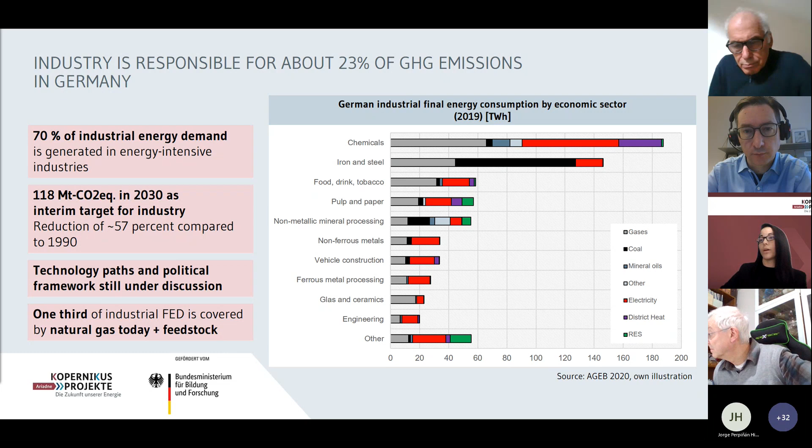In our scenario analysis in the Kopernikus project Ariadne, we normally try to gain knowledge by comparing different alternatives. We looked at 5 scenarios in this project, but today I will only talk about 2: the mix and the energy sovereignty scenario, which are both climate neutrality scenarios.

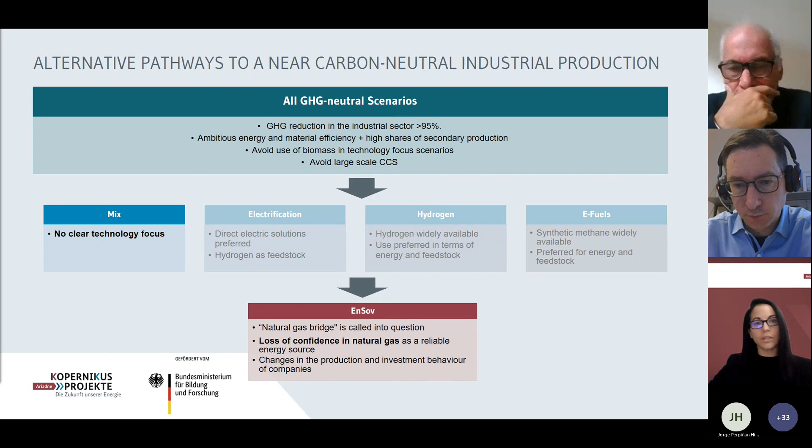In 2045, we want to achieve near climate neutrality in industry. In the mixed scenario, we have no clear technology focus, meaning we mainly use technologies with a very high TRL in the sectors, or which are discussed as particularly promising. In the energy sovereignty scenario, shown in red, the scenario is characterized by a very strong loss of confidence in natural gas as a reliable source of energy, so companies, especially in the short term, try to do everything to reduce their demand for natural gas.

When we look at the overall scenario results, on the right-hand side is the industrial energy consumption for Germany, energetic and feedstock uses for both scenarios. In both scenarios, not surprisingly, we see that the industrial transformation really needs high amounts of CO2 neutral energy carriers. In red is the development of electricity, blue is the future hydrogen demand. Depending on the scenario, we achieve between 250 and 280 terawatt hours electricity demand for industry, and between 200 and 300 terawatt hours of hydrogen demand in industry. This is even though we already assume very ambitious improvement in material efficiency, circularity, and changes in activity effects in the scenarios.

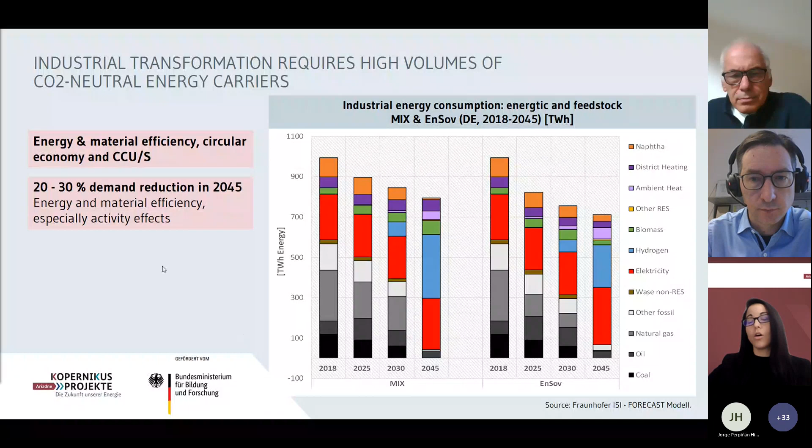What we see on the right-hand side in the energy sovereignty scenario, where we have this loss of confidence in natural gas, is that we will have a very strong reaction to the high natural gas price signals, which leads to a permanent decline in natural gas demand in this scenario, around 50% compared to today's level, mostly taking place in steam and hot water generation in industry.

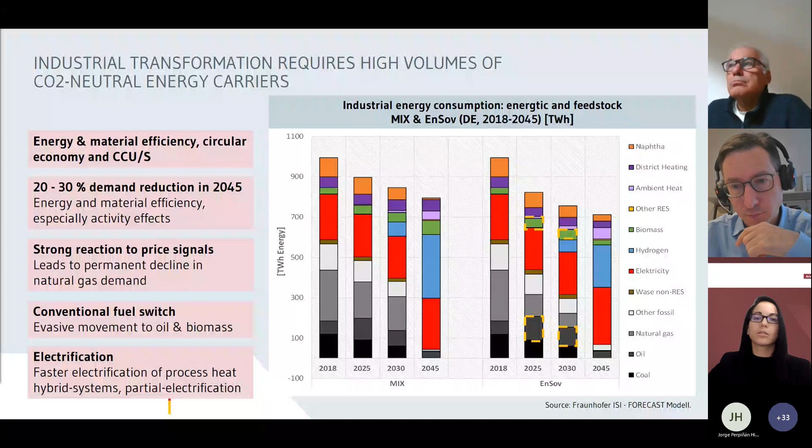But what we also see in parallel is that, without additional measures, there is an evasive movement in this sector toward more CO2 intensive energy carriers like oil, but also to a certain degree biomass, because electricity is not competitive without additional measures. To counteract this evasive movement, faster electrification of process heat, for example using hybrid systems in steam and water generation, but also maybe partial electrification in the area of furnaces, could help counteract this short-term target conflict with our long-term climate neutrality ambitions.

What we see relatively robust throughout all scenarios we looked at, including others not shown today, is hydrogen demand in steel production via direct reduction, and also as a feedstock for the chemical industry. This demand is really distributed among very few industrial locations, I think around 20 in Germany.

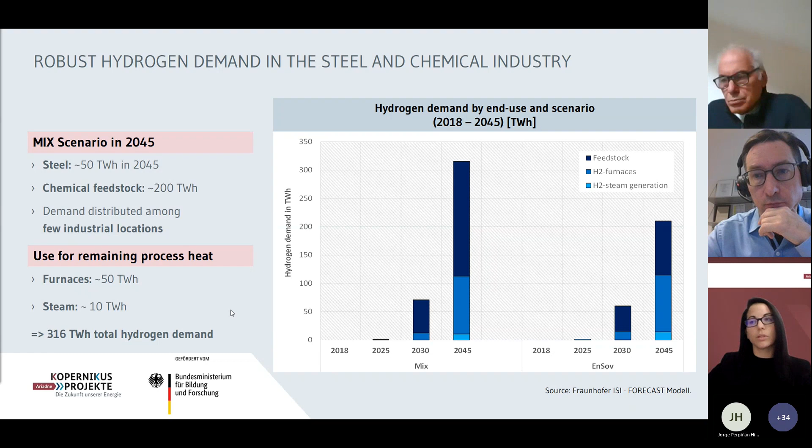If we would increase this demand up to the remaining process heat, we see here 60 additional terawatt hours of hydrogen demand in the scenario. This demand would then really require a large-scale expansion of the hydrogen distribution grid. Especially the use of hydrogen or electricity in the remaining process heat really depends on sector-specific factors, especially in the area of furnaces, which are very heterogeneous and require individual considerations. So there is still a certain degree of uncertainty for the remaining process heat via either the use of hydrogen or electricity.

For the chemical industry, we see a certain challenge because in the decarbonized target system, new sustainable carbon sources need to be developed. In our scenario, where chemical production stays in Germany and is probably based on green hydrogen, we would need 30 million tons of CO2 demand to produce methanol and high-value chemicals via the MTO route. One way to provide this CO2 could be to capture and use emissions from other industrial sectors, especially sectors that are very hard to decarbonize, like the cement and lime industry.

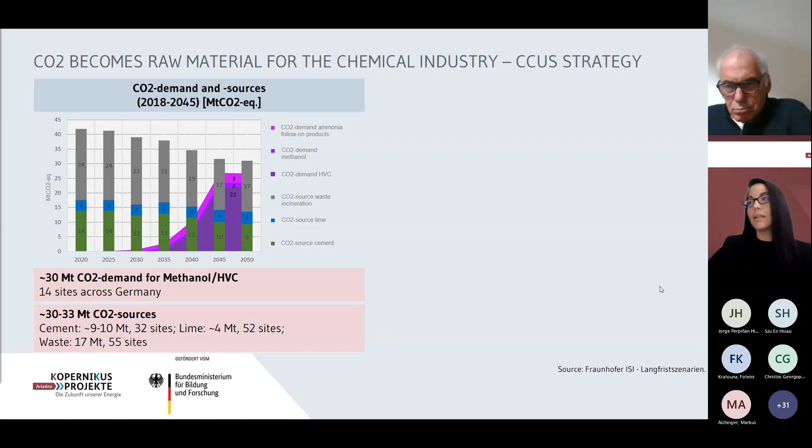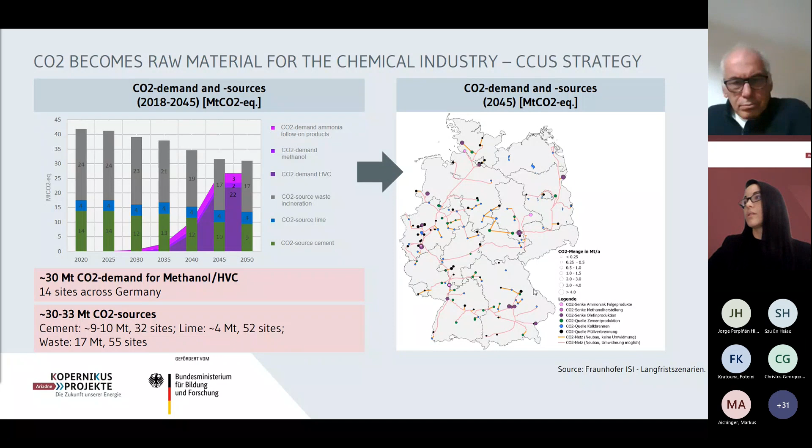The potential sources and the potential demand would more or less add up in this scenario, but there are still challenges, because to really address these potential sources and demands, you need a combined carbon management strategy. On the right-hand side, you see a potential CO2 transport network for Germany, more than 5,000 kilometers, which could partly be generated by reusing the existing gas network. But there are also other potential conflicts, since this gas network could also be used to produce power-to-gas or hydrogen. So we really need a combined strategy to address CO2 demand and sources and build up the necessary infrastructure.

The German steel industry also has a very special role in the transformation of the industry sector because it's central in ramping up the hydrogen market. In Germany currently there are various announcements from different companies that around 15 billion euro investment will take place to hopefully provide 10 million tons of crude steel production capacity via green hydrogen reduction by 2030.

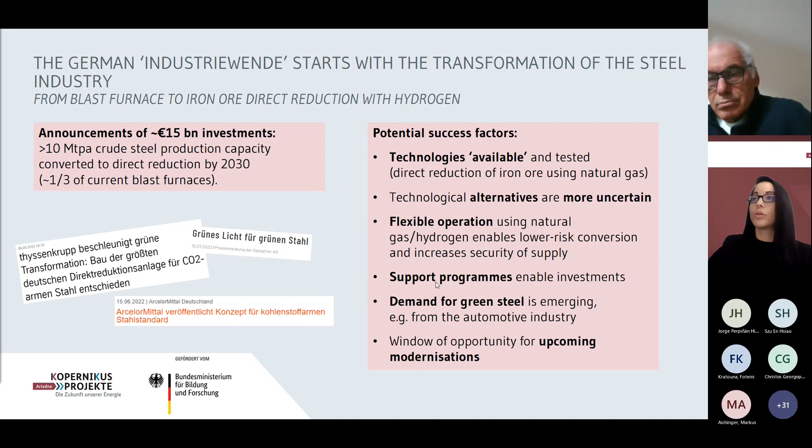There are some factors that let us hope this will be successful. There is already experience with this technology, and green hydrogen reduction combined with natural gas has the potential to provide flexibility for the energy system - using natural gas when electricity prices are high, and hydrogen when we have a lot of renewables in the system. We also see support programs coming to enable investment, and a market building for green steel, especially from the automotive industry. There's also a window of opportunity because of upcoming modernizations in the steel industry, which should now be tackled by transferring the sector to green, CO2-neutral production technologies.

What we also see is that industry is still in a very strong tension field between economic efficiency - now facing very high natural gas and electricity prices - security of supply with the limited availability of green hydrogen in the near future, and sustainability. So there is still need for improvement, and forward planning is really necessary.

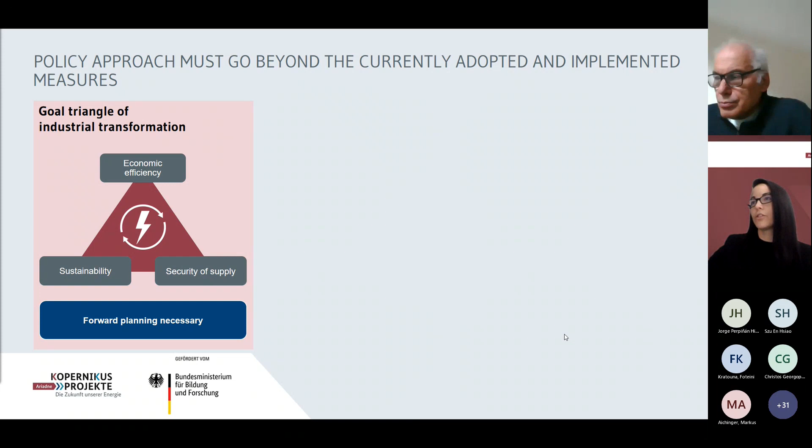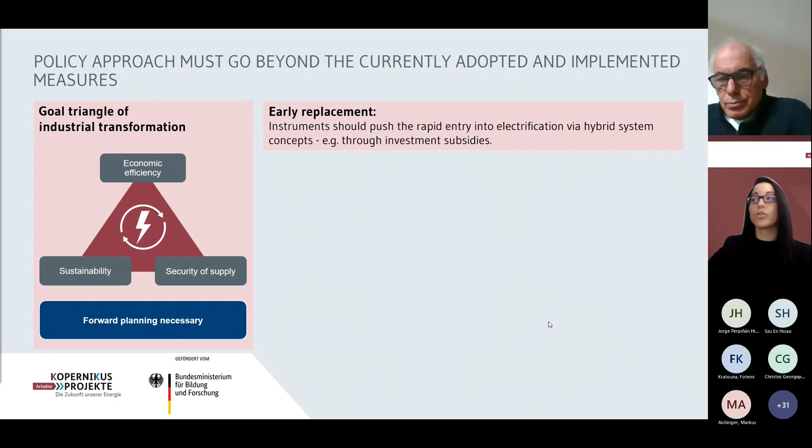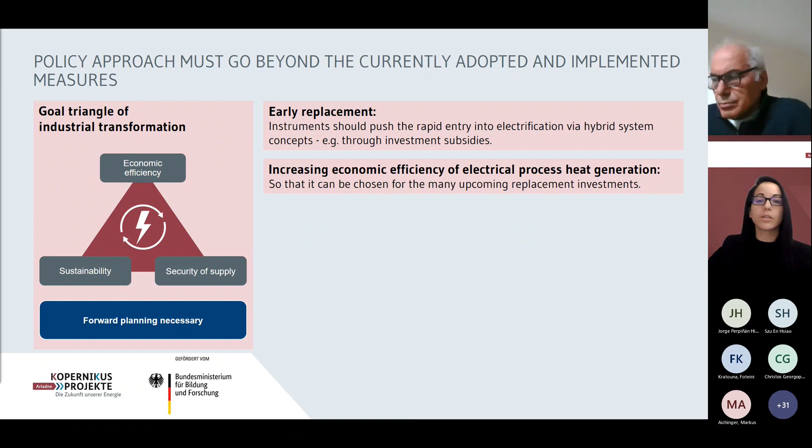Here are some ideas on what are really relevant points for the industry sector in Germany. We need instruments that support the early replacement of plants in steam and hot water generation to push electrification. We also have to increase the economic efficiency of electricity, which is currently not competitive with fossil sources and biomass. What we also need is a very strong and reliable CO2 price signal so that we can get very CO2-intensive energy carriers like coal or fuel oil out of the system.

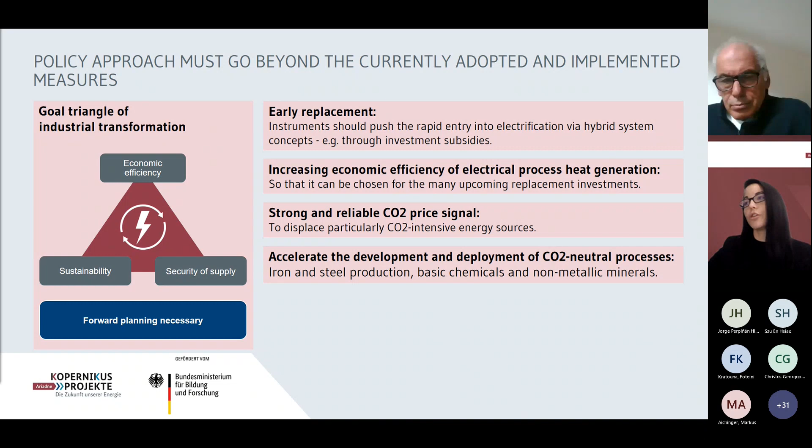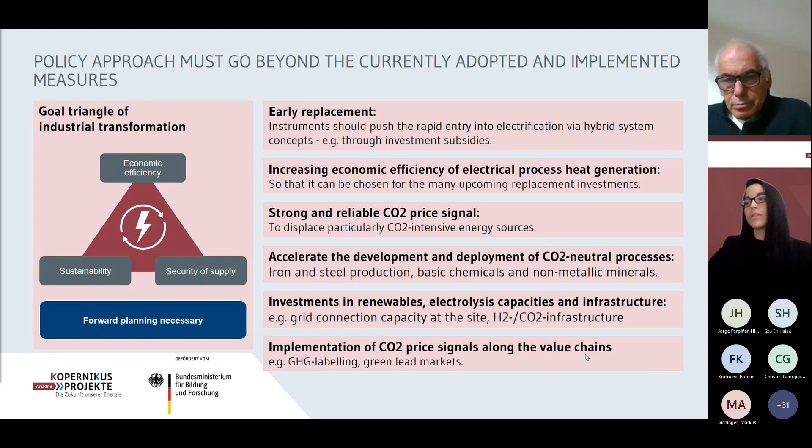Overall, we also need to accelerate the development and deployment of CO2-neutral processes for steel, chemicals, and non-metallic minerals. As I said before, this will only be possible if we have the necessary investments in renewables, electrolyzer capacities, and the necessary infrastructures. Last but not least, there also needs to be a market for these products, and a possibility to pass these CO2 price signals along the value chain to the end consumers. One possibility could be the establishment of green lead markets.

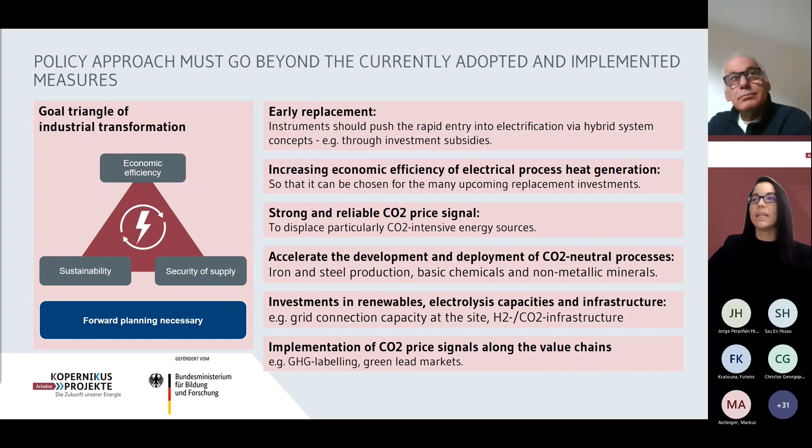And with this, I give you only a very short introduction into what we do in our system analysis project, and I'm looking forward to your questions. Thanks.

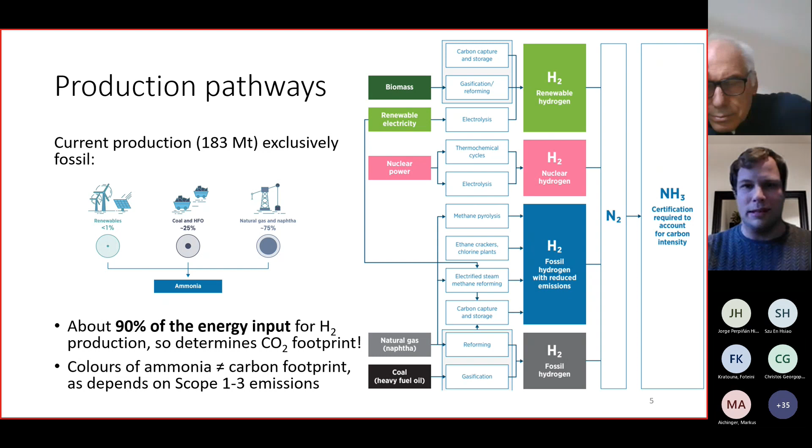Another thing to keep in mind is that colors of ammonia - green, blue, pink, gray - are useful for discussions of how the ammonia is produced, but it is not equivalent to carbon footprint, because depending on where you source your energy or electricity, it really determines in the end your carbon footprint. So for that, we need certification.

When looking at decarbonizing ammonia production, we see that a lot of projects have been announced. We keep a list of all these projects, and what you see here is the total capacity that is announced. You see that the total is somewhere around 170 million tons per year - that's a lot, almost the same as the current ammonia production.

It should be noted that this accounts for all the projects. There are quite some projects which have just an announcement that they want to produce renewable ammonia or low carbon fossil-based ammonia. However, there are quite some projects already starting initially with a few megawatts, a few tens of megawatts of renewable ammonia production. So that's quite interesting to see.

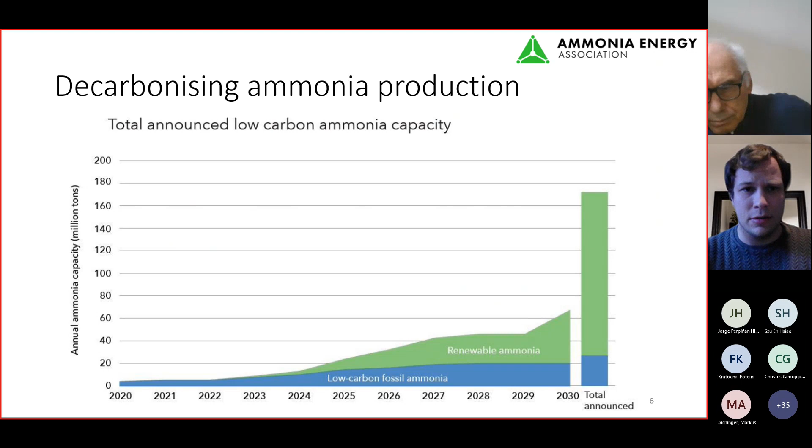So what are some of the drivers that we see? In the EU, we have this ETS system.

So basically, if you emit CO2, you're being taxed. And also CBAM. We see that the shipping industry will be fully introduced in the emission trading system by 2026, which immediately means that low carbon fuels for shipping in the EU become competitive with fossil alternatives like LNG and heavy fuel oil.

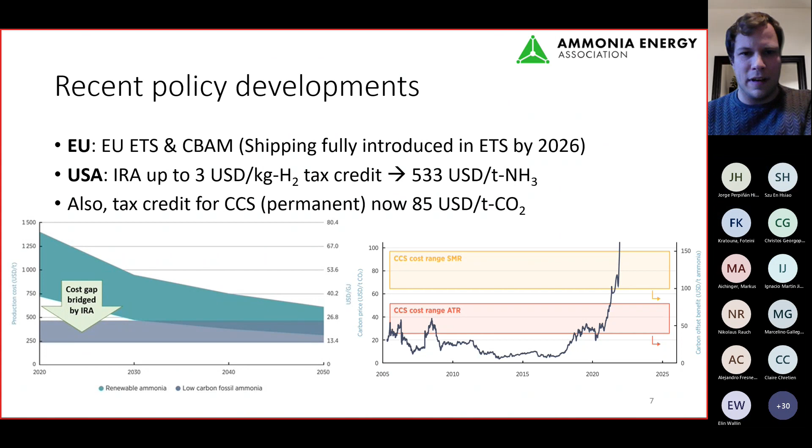So we can actually expect that the shipping market will be one of the early uptakers of ammonia. And also in the US, there is quite an aggressive package with the Inflation Reduction Act, with $3 per kilogram of hydrogen for the lowest carbon emissions, and it really is a driver to decarbonize ammonia production. And also for existing ammonia production, where you don't need CO2 downstream, they could actually do CCS, and the tax credit that you get for that now, so the $85 per ton CO2, that's actually competitive to put it into the ground versus emitting it. So these are quite some developments that make low carbon ammonia production quite competitive.

One note here is also that this has been operational for 100 years, but most of these plants have actually shut down, mainly because fossil-based ammonia production with natural gas was just a lot cheaper. So it is not a matter of technology readiness level, it's more a matter of economics. But as we see these new legislations coming into place with taxes on CO2, so some penalties, we might see a resurgence of renewable ammonia production.

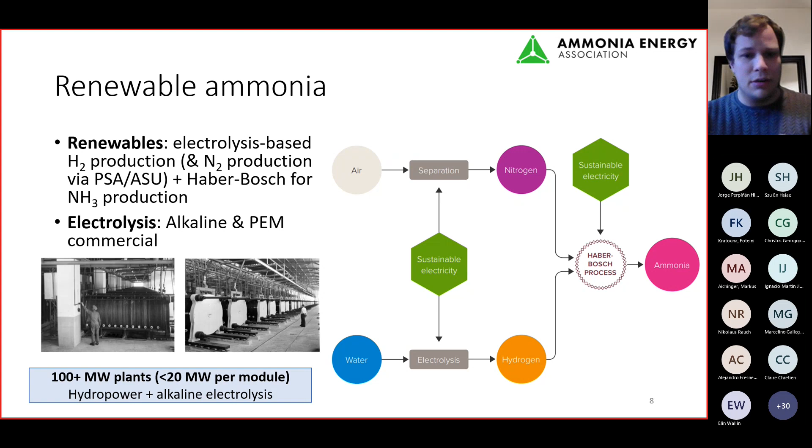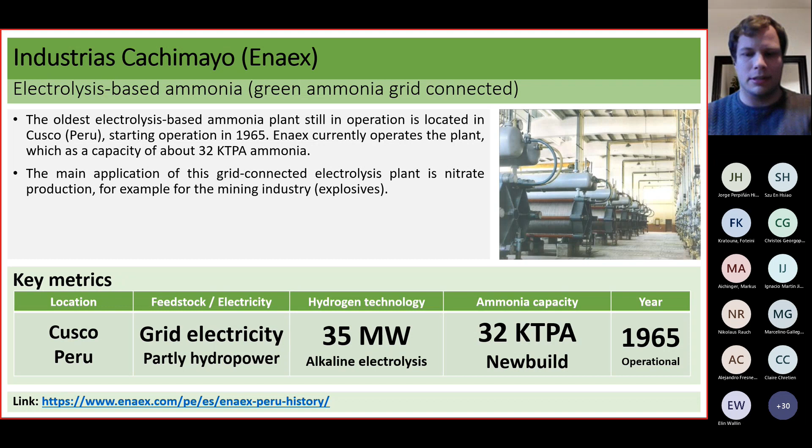So what you see here is actually the last of these old, as we say, electrolysis-based ammonia production plants. This one is located in Peru, a relatively small plant with 35 megawatts of alkaline electrolyzers. They produce about 32 kilotons per annum of renewable ammonia. In this case, it's connected to the grid, so no fluctuations. And recently they signed a new power purchase agreement where the electricity of this plant is 100% renewable sourced. So that is actually the last of the renewable ammonia plants based on hydropower that's still operational.

But what we see now is a lot of movement in renewable ammonia production from solar and from wind. And as you know, solar and wind are fluctuating. So this also means that there's a challenge to operate your ammonia plant in a fluctuating way. So you can do that based on either having a flexible ammonia loop or by having a storage buffer, for instance, for hydrogen storage, or maybe a small battery storage for your electricity. And typically in practice, it's a combination of both.

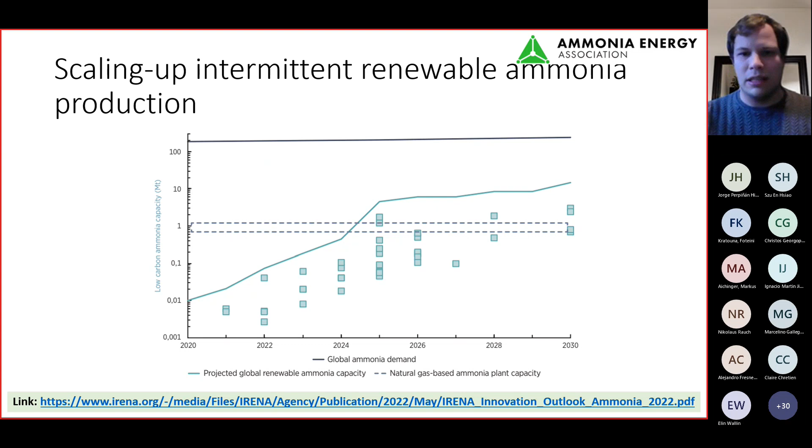But as this is not mature technology yet, so the fluctuating ammonia production, what we expect to see in the coming years is that the scale of these plants will increase every year. And by 2025, 2026, we expect the first world-scale renewable ammonia plants to come online. So what you see here on this graph is on the x-axis the time, so 2020 to 2030. And the y-axis, the logarithmic scale of low-carbon ammonia production capacity, where all these different dots are individual projects for renewable ammonia production. And the dotted line there is a world-scale natural gas-based ammonia plant. So you see that beyond 2025, 2026, you see world-scale renewable ammonia plants.

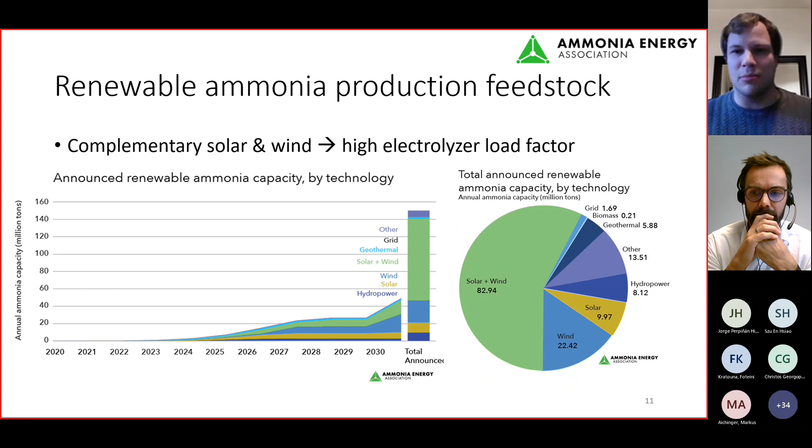And what are these based on? So what you see here is that most of the projects are actually based on solar and wind. So not just solar, not just wind, but actually the combination of both. And the reason for that is that if you have the right complementary solar and wind, you can basically have a high load factor for renewable electricity, which basically means that you can build a smaller electrolyzer, making the project more competitive.

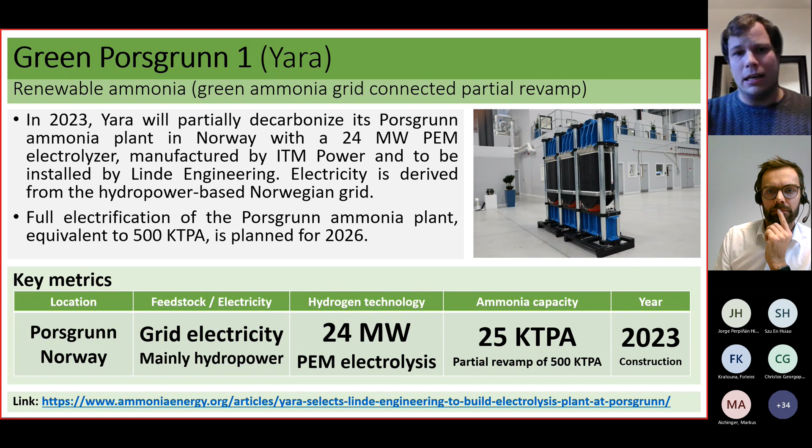So there are a few projects I want to highlight before finishing off. In Norway, where the grid is mainly based on hydropower, the fertilizer producer Yara will install 24 megawatts of PEM electrolysis by 2023, partially decarbonizing their existing natural gas-based ammonia plant. They are also looking into fully decarbonizing that.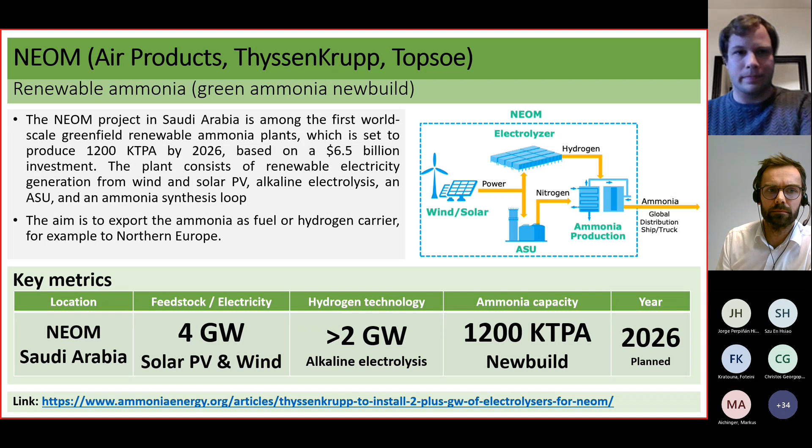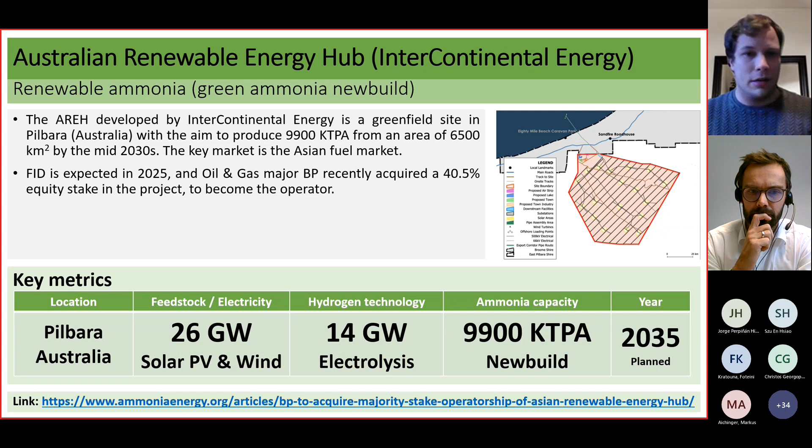What I want to show is that in the far future, project developers are also thinking about tens of gigawatts of projects—really renewable energy hubs. This is the Australian Renewable Energy Hub, where the goal is to have 26 gigawatts of solar and wind to produce almost 10 million tons of ammonia per annum. This is really ammonia production as a hydrogen carrier and zero carbon fuel at oil and gas scale.

With that, I'd like to thank you for your attention.

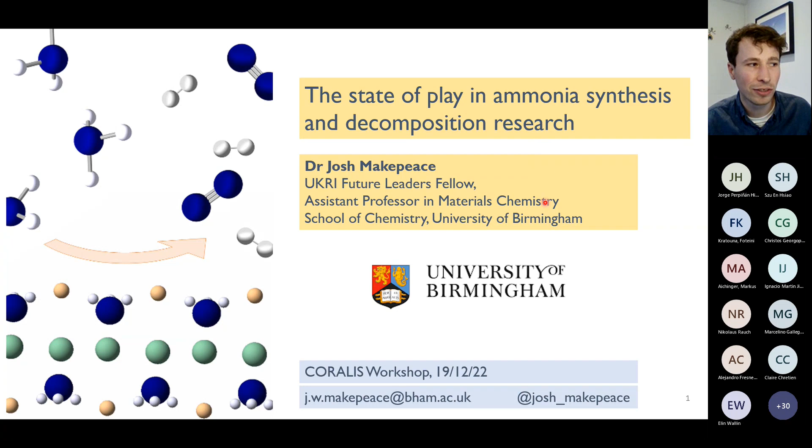Thank you very much for the chance to present today. As was just mentioned, my aim is to talk a little bit about the state of play in ammonia synthesis and decomposition research. We've just had from Kevin a great overview of the larger landscape of ammonia decarbonisation and some of the potential associated with that transition. I'll try to focus on some of the key technological developments which might help accelerate that transition. My name's Josh Makepeace, and I'm a researcher in ammonia synthesis and decomposition catalysis at the School of Chemistry at the University of Birmingham.

As Kevin just mentioned, it's important to highlight before I dive into the research going on in ammonia synthesis catalysis, that actually the vast majority of the greenhouse gas and energy footprint of ammonia production is associated with the hydrogen production method. So you might reasonably ask what the value of further research in ammonia synthesis catalysis is.

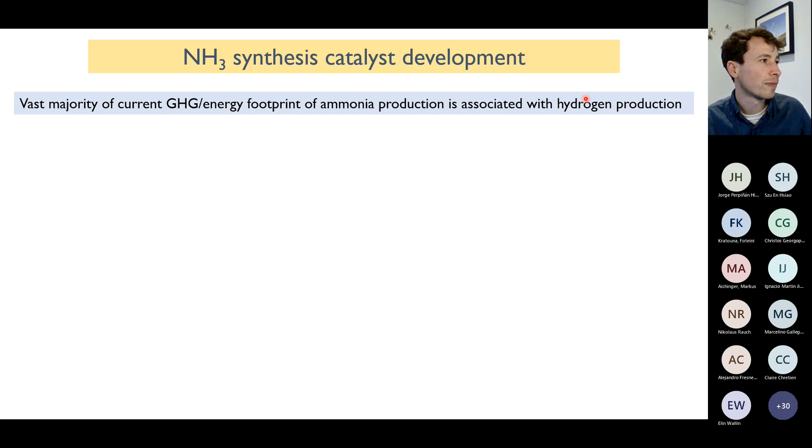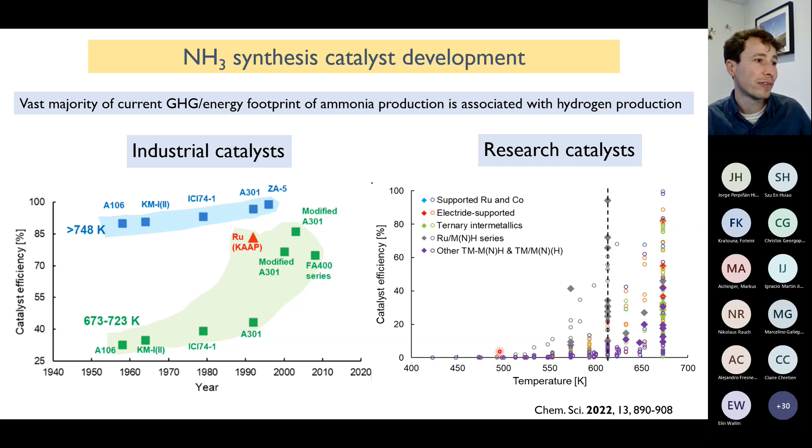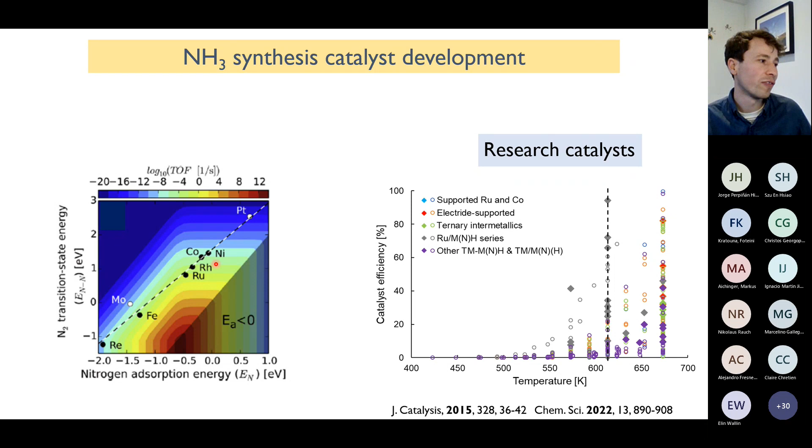One of the key limitations to the development of conventional transition metal-based catalysts has been explored through some really interesting computational work by Jens Norskov's group, which looks at predicting where the most active ammonia synthesis catalysts would be based on their interaction with nitrogen gas in particular. What they find is that essentially development of conventional catalysts moves you up and down this line here, whereas the most active synthesis regime would be in this red region here. So we need to think about new catalyst paradigms that allow us to move off of this kind of restricted model of ammonia catalysis.

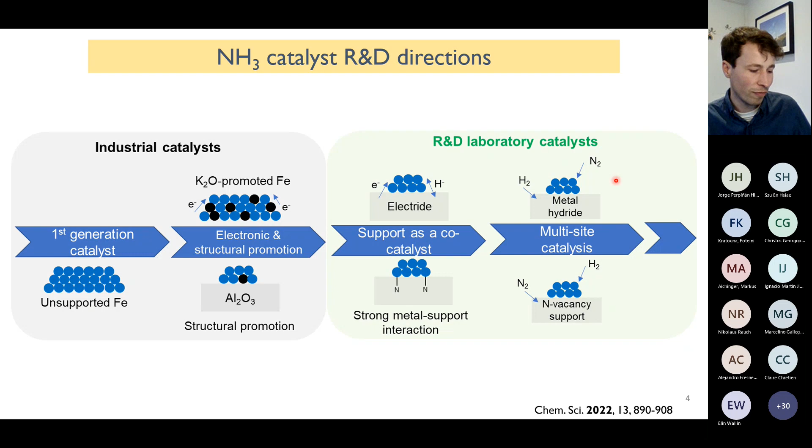So if we were to think about it principally using ammonia as a hydrogen carrier and think about completely decomposing it into hydrogen and nitrogen, that's required for PEM fuel cells, hydrogen fuel cells that are currently dominating in the market, but also thinking about feeding hydrogen into the gas grid.

As Kevin mentioned, there are a number of projects actively looking at that kind of ammonia cracking. But we could think about ammonia hydrogen blends, where there are fuel cell technologies which are more tolerant to residual ammonia in the gas stream. Or indeed thinking about ammonia hydrogen mixtures for combustion applications, such as being considered for maritime fuel applications. And indeed, there are fuel cells, such as solid oxide fuel cells, which operate at very high temperatures and so might not require active ammonia cracking at all. So there's potential for this dynamic use of ammonia that could be enabled by ammonia cracking technology.

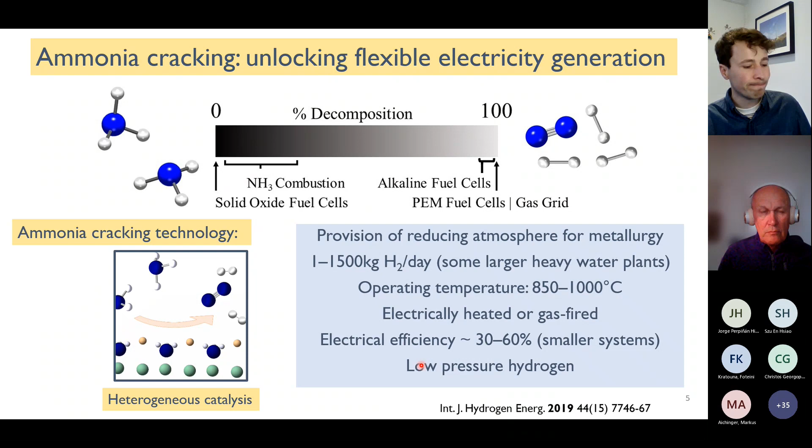So what are the key things to think about if we're looking to develop ammonia cracking technology that's more suited to these kinds of decarbonisation activities?

Just to mention a few key facts about the ammonia cracking process: it's thermodynamically favorable above 190 degrees Celsius, so can in theory happen at much lower temperatures than current units allow. But it's kinetically hindered, so we need catalysts to help promote that process. The process requires a continual input of energy of around 45 kilojoules per mole of ammonia cracked, which presents challenges for reactor design. That means we need an external heat source, equating to around 12% of the energy content of the ammonia.

A key thing to think about is also the residual level of ammonia because of its toxicity or incompatibility with some end uses. This is what we'd expect the equilibrium ammonia concentration to be at different temperatures. If we needed to hit the PEM fuel cell limit, we'd have to be at very high temperature or use some kind of purification approach.

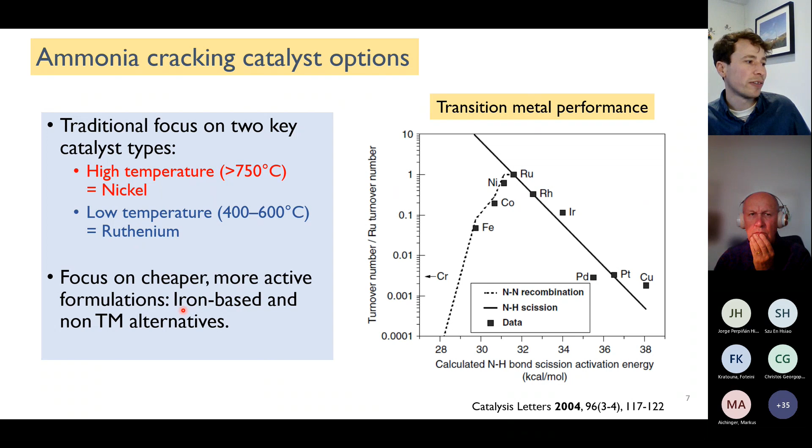In the research field, there's a real focus on cheaper and more active catalyst formulations, particularly iron-based ones and non-transition metal alternatives. Some of the work we've been involved in looks at developing metal amide and imide catalysts, which show very promising catalyst performance at lower temperature compared with ruthenium, nickel, and iron. So there are some emerging opportunities for these kinds of materials.

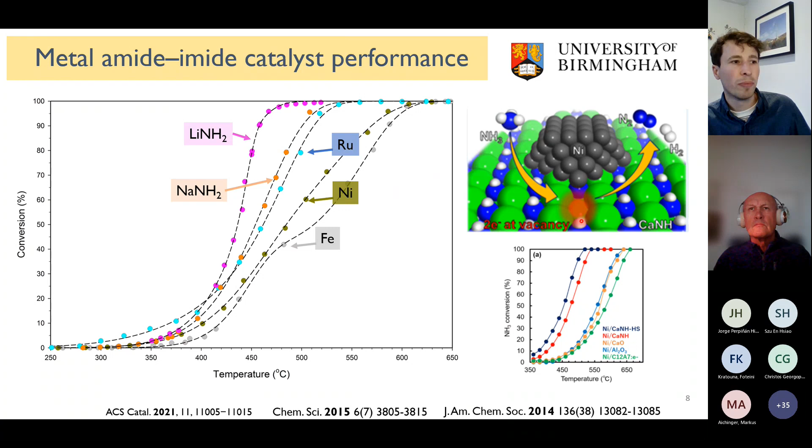Indeed, some recent work looks at combining metals and metal amides and imides in this kind of two-site catalyst model that I mentioned for ammonia synthesis.

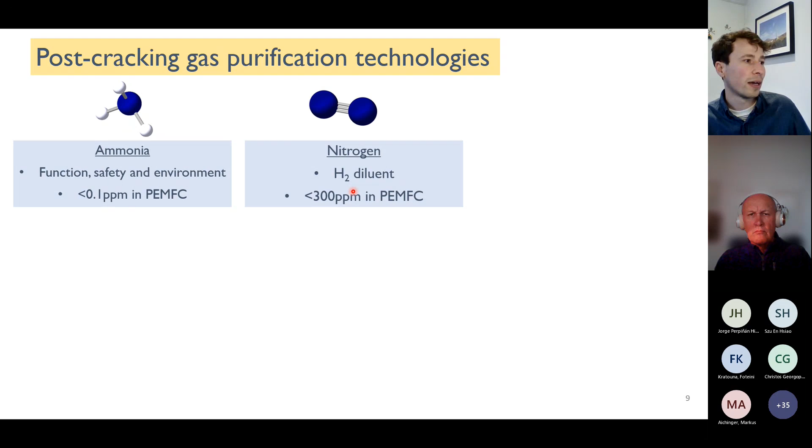With ammonia cracking, we also need to think about purifying the gas stream. We have ammonia, which could be problematic from a function, safety, or environmental perspective. Nitrogen can dilute your hydrogen fuel stream and needs to be controlled for PEM fuel cells. And NOx emissions are a key factor to consider with combustion-based applications.

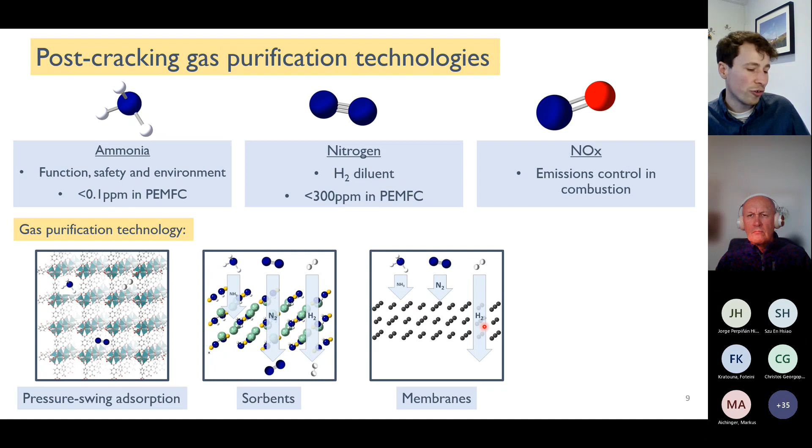There are a lot of technologies being used for gas purification, whether traditional pressure swing adsorption, ammonia sorbents that simply trap ammonia from the gas exhaust, or more sophisticated technology like gas selective membranes that selectively transport hydrogen for your application, or further catalytic treatments that remove NOx or ammonia. These are all under active consideration for ammonia cracking units.

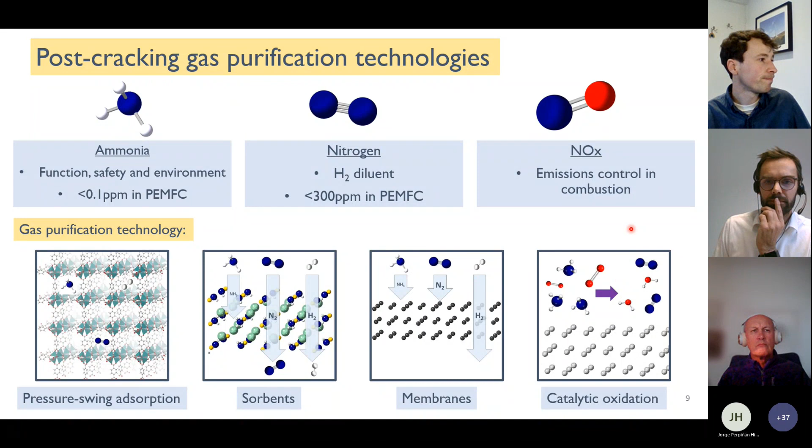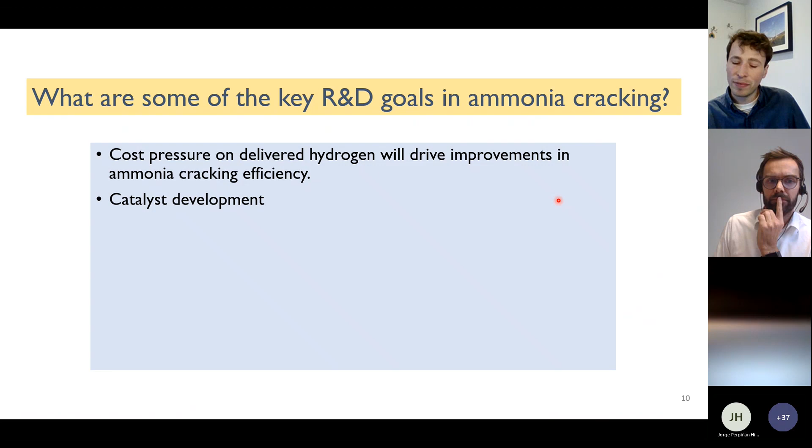I want to highlight some key research and development goals in ammonia cracking before I finish. The cost of delivered hydrogen is going to be a key driver in improving ammonia cracking efficiency. That comes down to catalyst developments, but also key aspects like reactor design, which allow for optimal thermal management of this endothermic process, or integration of sorbents or membranes that purify the gas stream as part of the catalytic reactor.

We're increasingly going to see interest in integrating ammonia cracking with power generation, such as combustion units that can make use of waste heat for cracking applications, as well as high pressure cracking and intermittent operation. Intermittent operation, as Kevin mentioned, runs across ammonia synthesis and decomposition to ensure these technologies can be effectively coupled with renewable electricity.

So that was a very quick whistle-stop tour of ammonia synthesis and decomposition research, and of course happy to answer any questions or take questions via email. Thanks very much for your attention.

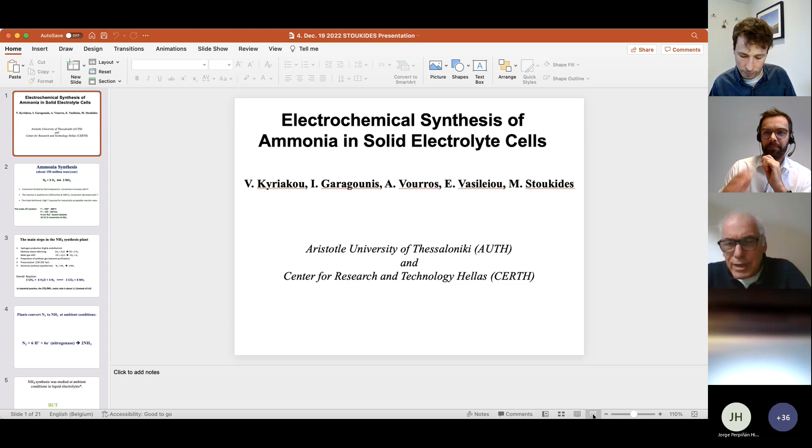Thank you, Claire. Excellent. In the next 10 minutes, I will try to present the progress in the electrochemical synthesis of ammonia using solid electrolyte cells. I'm Michael Stoukides from the Aristotle University of Thessaloniki. And next, please.

Ammonia synthesis is of key importance for humanity in general. We're talking about more than 150 million tons per year, and quite soon we will be reaching 200 million tons per year. It looks like an easy reaction, nitrogen combining with hydrogen, but in fact it's not. It involves thermodynamics, kinetics, everything.

In terms of thermodynamics, we have 4 volumes of gases producing 2 volumes of ammonia, so conversion is limited by thermodynamics and increases with pressure. In terms of kinetics, we have an exothermic reaction, so conversion decreases with temperature. As mentioned before, the idea of going to very low temperature to achieve higher conversion is wrong, because the triple bond in the nitrogen molecule is one of the strongest in nature. It's very hard to break that bond, so you have to use high temperatures.

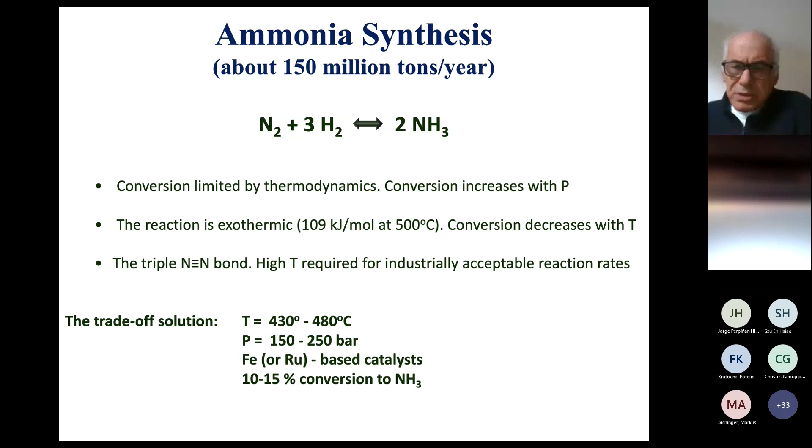So the trade-off solution in industry for the past 100 years was to use temperatures between 400 and 500 degrees centigrade, and high pressures like 150 to 250 bars. Under these conditions, the conversion is of the order of 15%.

Once hydrogen is produced, it has to undergo extreme purification, because trace amounts of pollutants poison the very sensitive ammonia synthesis catalyst. Once it's purified, the synthesis gas has to be pressurized. All these steps are both energy and cost consuming. And finally, we have the reaction of hydrogen and nitrogen to produce ammonia.

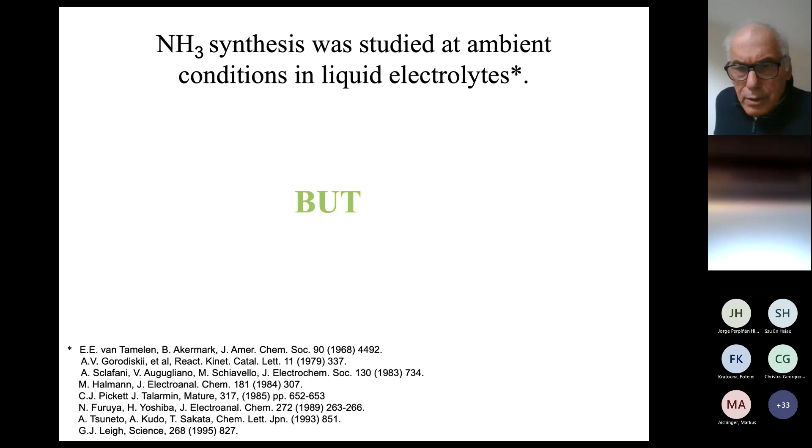In an effort to imitate nature, ammonia synthesis was studied at ambient conditions in liquid electrolytes. But success was limited because liquid electrolytes operate at low temperatures, and at low temperatures, reaction kinetics are too slow. So we did not have much success.

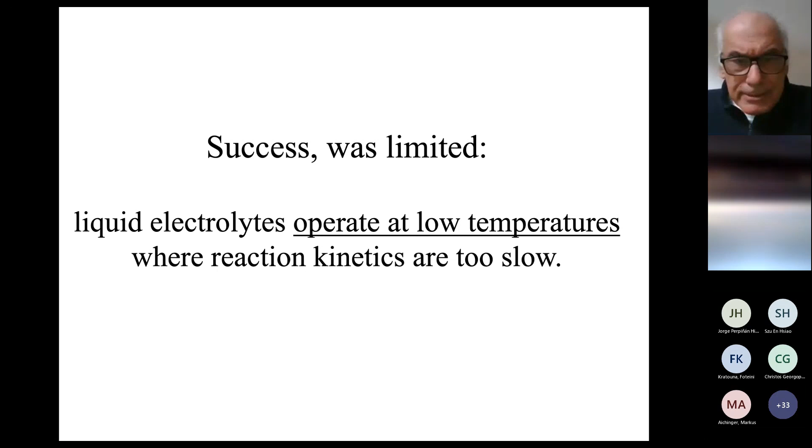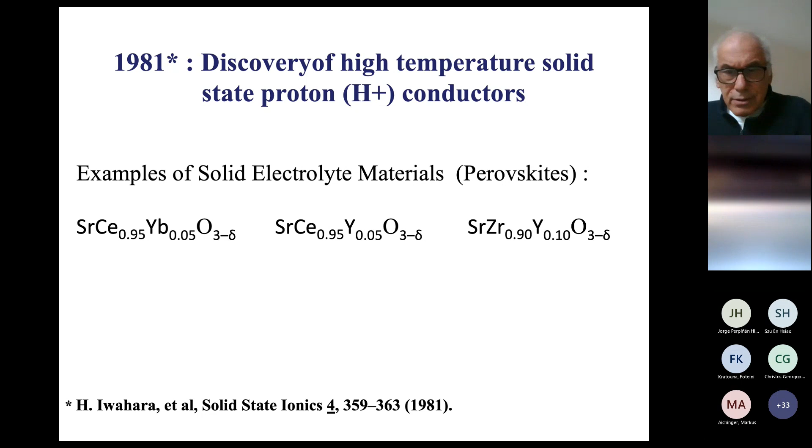Hopefully, thank God, we had the discovery in the early 80s of solid state materials, high temperature, that can operate as proton conductors at high temperatures. These are perovskite type materials, as you can see here. Using these materials, we were able to produce ammonia from hydrogen and nitrogen at atmospheric pressure and at temperatures of about 500 degrees or higher.

The system is simple. You have a solid electrolyte. On one side, at the anode, you have the production of protons from hydrogen. At the cathode, protons react with nitrogen to produce ammonia. This is what started as what was named solid-state ammonia synthesis.

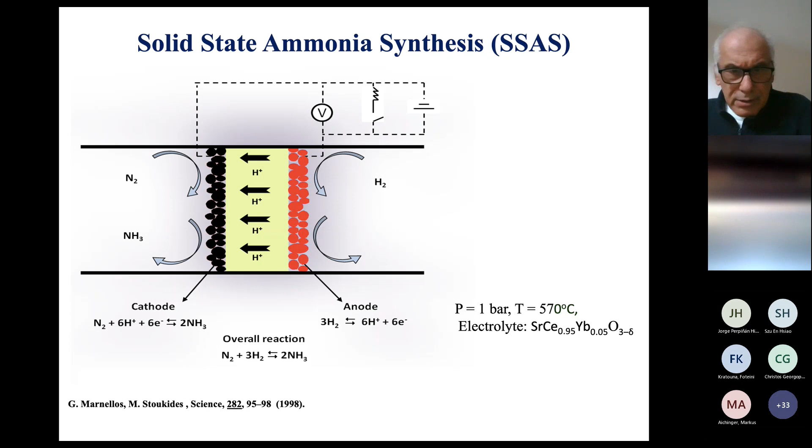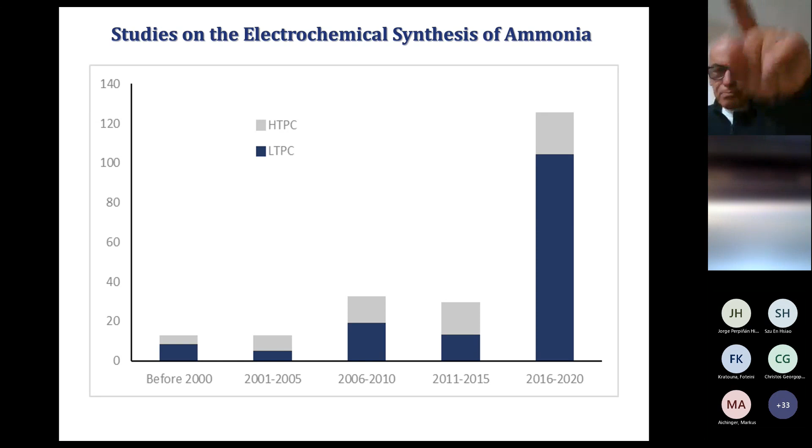In the past 20 years, the two major problems in electrochemical synthesis of ammonia were identified. First, how to increase the conductivity of the proton conductors, since protons are a reactant, and the proton flux determines the rate of production. The second problem is the Faraday efficiency, defined as the fraction of protons that are converted to ammonia. Why is that fraction not 1? Because there is a more favorable reaction of two protons combining with electrons to produce gaseous hydrogen, so we have hydrogen evolution.

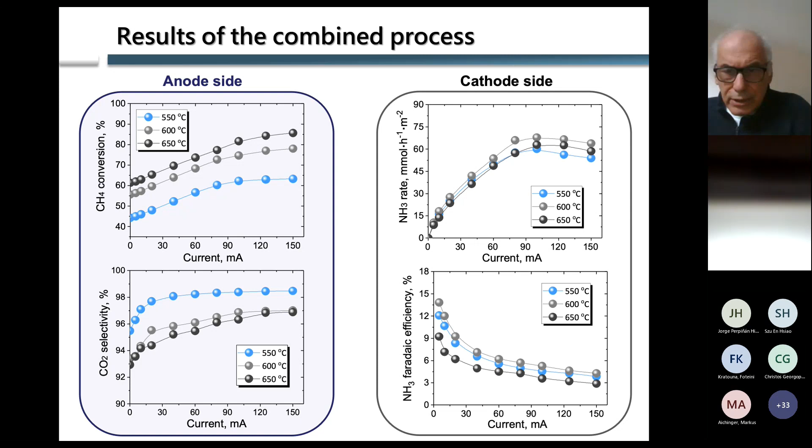At the anode, we have a methane conversion up to 70%, with the CO2 selectivity exceeding 99%. So essentially, we convert all methane into CO2.

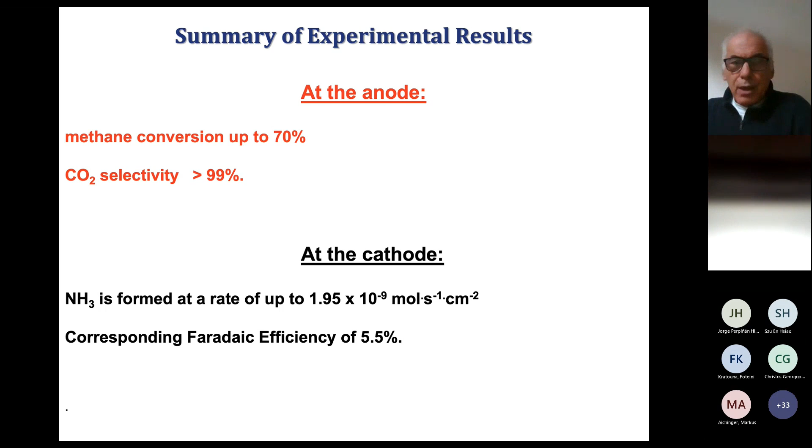At the cathode, we have a reasonably high reaction rate of ammonia synthesis. Unfortunately, the Faraday efficiency is not high—at steady state, it's about 5.5%.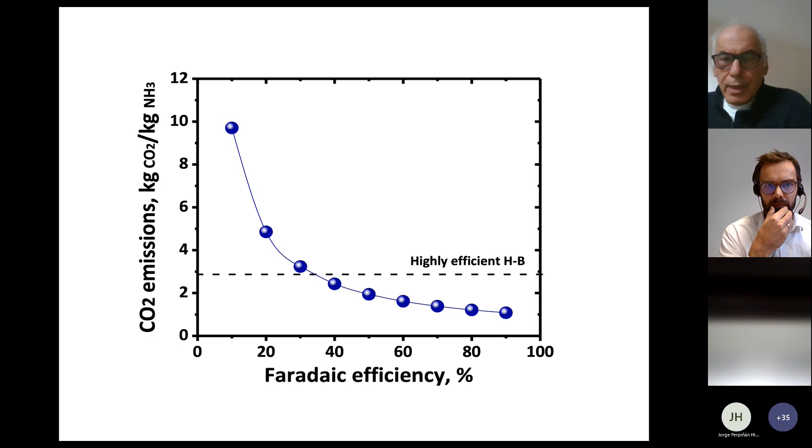Of course, you can ask—this workshop is for decarbonization—if I say just reduce a little bit the CO2, maybe you're not satisfied. So I have a better picture for you, next.

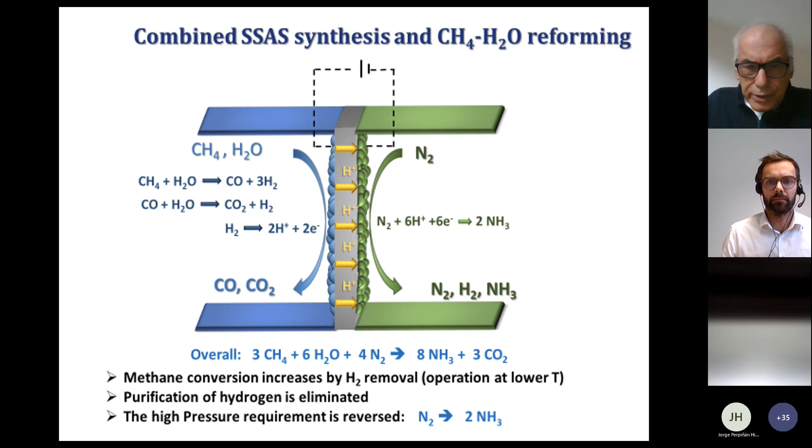So, to summarize, if you want to get rid completely of methane, fine, do it, but you will spend more electrical energy. But you can do it. And I think that's the last one—I hope I kept my time.